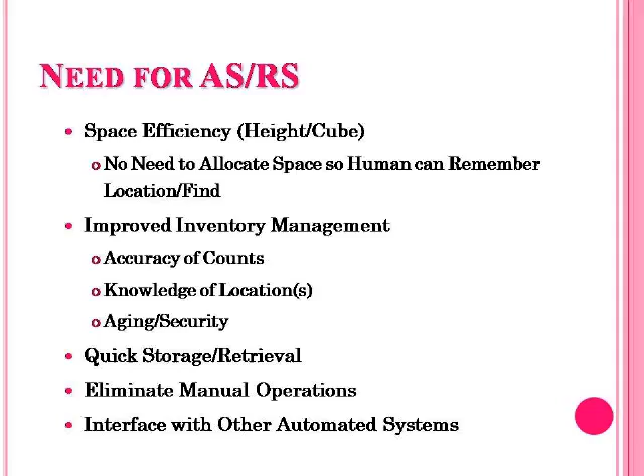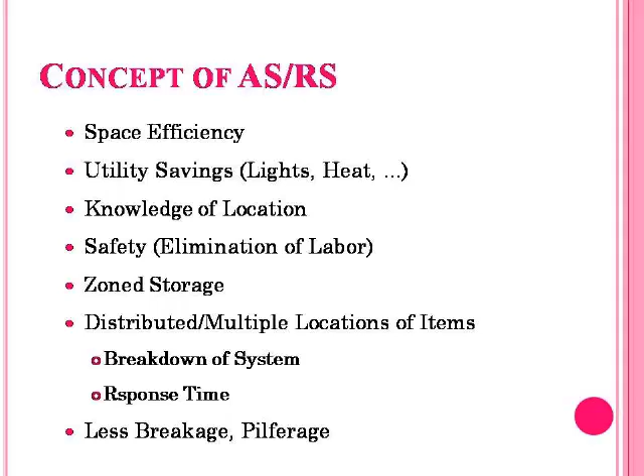The concept of ASRS arrived due to space efficiency, utility savings, knowledge of location, safety, zone storage, distribution, multiple locations of items, breakdowns of the systems, response time, and less breakage and pilferage, etc.

This storage or retrieval machine will travel in the aisle and try to locate items. It can move horizontally as well as vertically, and reach any space available in the storage racks. If the number of rows and columns are known, easily the ith row, jth column is the storage location of a storage rack. So the SR machine can be directed to move to that particular storage rack to retrieve or store the component.

And we have a storage space. The storage space is designed depending upon the maximum storage of the item in the manufacturing unit. Depending upon this, we can design the space of the storage rack.

Here we can have any number of units like this, depending upon the storage capacity that we want. This total height is called the rack height, this is the rack width, and this is the rack depth. The depth indicates how much length of the component, or how many baskets in which the components are placed, can be kept in each storage rack.

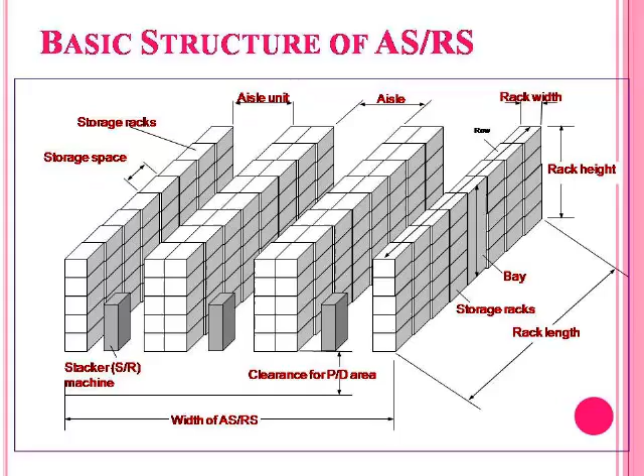This is the total rack length, and this is the total width of the ASRS. Width of the ASRS can be increased depending upon the space available on the shop floor, and the number of aisles and storage racks can be constructed accordingly.

The basic structure of the ASRS is just a storage structure. We have a storage and retrieval machine, the SR machine, which is normally a crane, and storage modules or pallets for unit loads. The loads are kept in pallets, and the pallets are kept in the storage bins.

One or more pickup and deposit stations can be used, where components are picked up, and stored items are retrieved and then placed. You can have more than one pickup and deposit station depending upon the number of requests for retrieval or storage of components.

You can have a number of servicing SR machines. At each SR machine we need one pickup and deposit station, and you can have any number of SR machines depending upon the number of aisles and other factors. This is always linked to the external handling system.

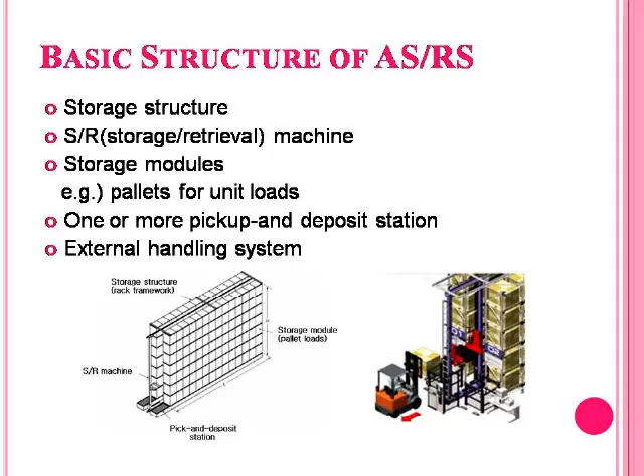The basic structure of the ASRS: this entire storage structure is normally a steel structure, clearly divided into a number of bays, each being a storage module. Depending on the kind of product we are going to store, we can design this as a transparent one or a closed kind of box.

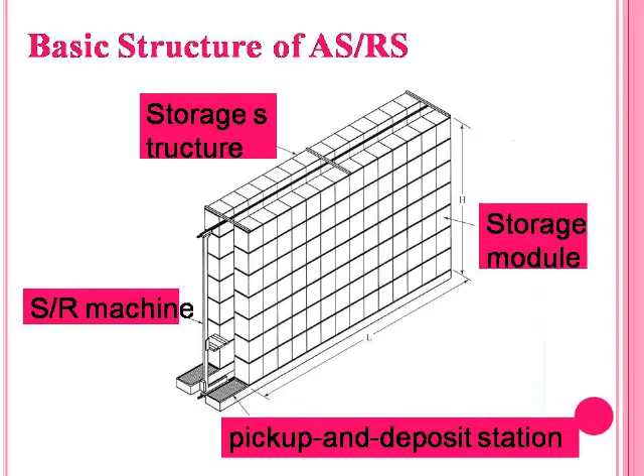And we have the SR machine, the storage and retrieval machine. It has a stacker crane, operated longitudinally and vertically within a storage module. The storage space, as discussed, is the three-dimensional space in the storage rack used to store a single load of material.

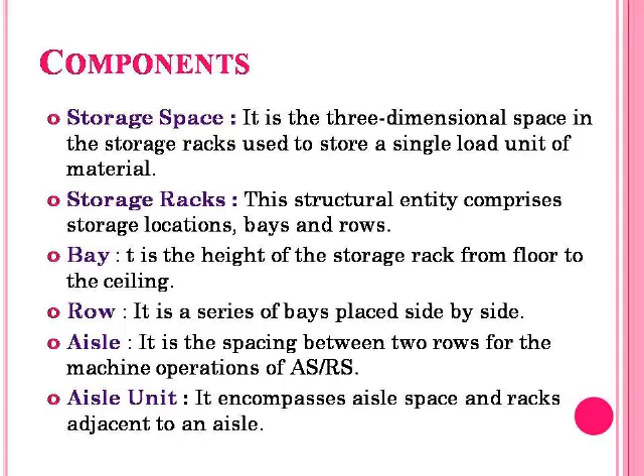Storage racks, this structural entity, comprise storage locations, bays, and rows. A bay is the height of the storage rack from floor to ceiling. A row is a series of bays placed side by side. An aisle is the spacing between two rows for the machine operations of the ASRS. An aisle unit encompasses the aisle space and racks adjacent to an aisle.

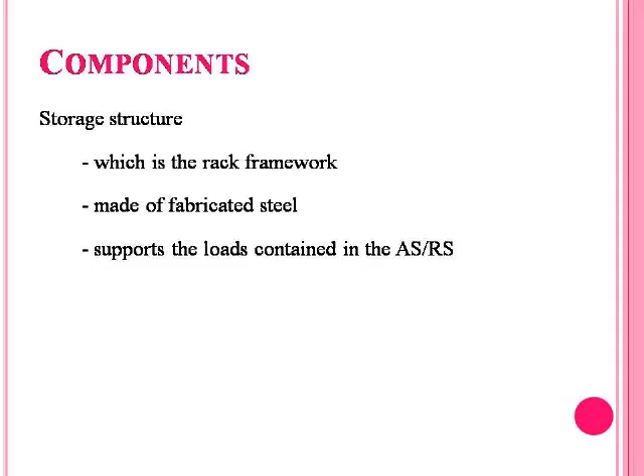Components: the storage structure is the rack framework made of fabricated steel, which supports the load contained in the ASRS. An SR machine, storage and retrieval machine, is used to accomplish storage transactions, delivering loads from the input station into storage, and retrieving loads or goods from storage to the retrieving station.

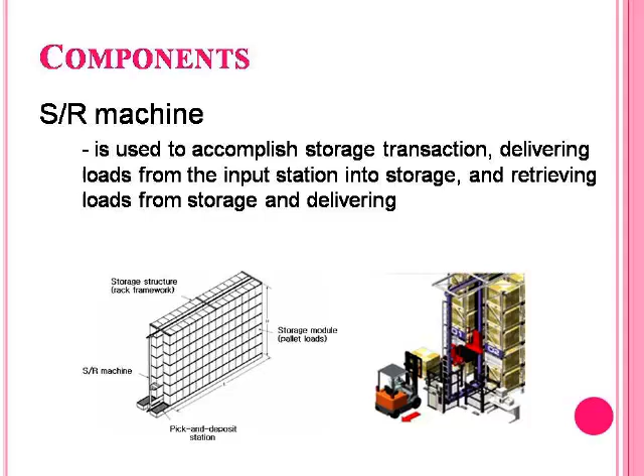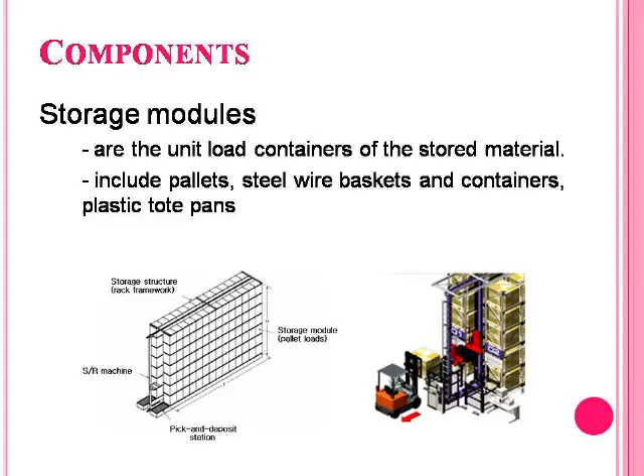So in these diagrams, you can see they are all self-explanatory about the SR machine. Storage modules are the unit load containers of the stored material, including pallets, steel wire baskets, containers, and plastic tote pans. The pickup and deposit station is where loads are transferred into and out of the ASRS, generally located at the aisle for access, for the external handling system that brings loads to the ASRS and takes loads away.

The components of ASRS include the external handling system that brings loads to the ASRS and takes loads away. You can take it as an AGV, RGV, or RTV - automated guided vehicle, rail guided vehicle, or robotic transfer vehicle. There are several kinds of external handling systems with which the ASRS has been integrated.

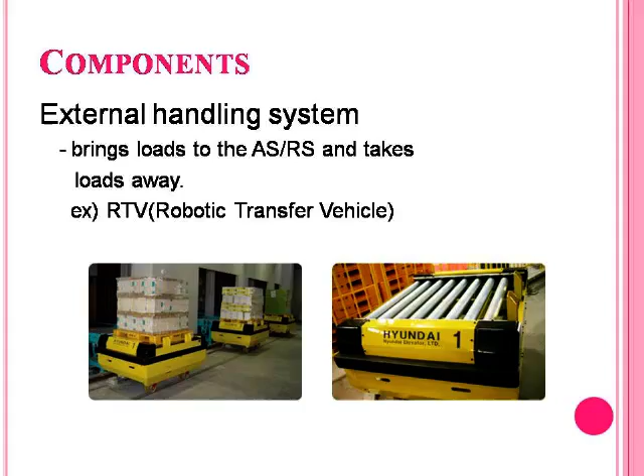Applications: ASRS associated with warehouses and distributed operation systems. Applications of ASRS include unit load storage and handling, order picking, and work in process storage systems, etc. ASRS for WIP - work in process inventory.

Buffer storage in production. Buffer is nothing but the semi-finished goods available between two workstations. When one workstation processes the part, after completion of the processing, it waits for the second workstation to get processed. Meanwhile, it has to wait for sometimes for the inspection purpose also.

In these cases, this waiting for the next operation - a semi-finished good waiting for the next operation - is called in-process inventory, or work in process inventory.

This WIP is a raw material on which certain operations are performed, and it is waiting for certain operations to be done on that. When the waiting time is in days, it has to be sent back to the warehouse or storage and retrieval system, and it will be picked up as and when it is required. Otherwise, the entire space between the two machines gets filled up with the WIP, and there is no space for work.

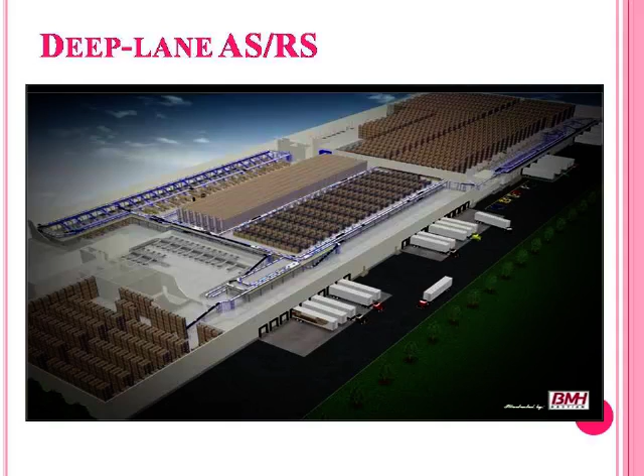A typical deep lane ASRS system can be seen in this slide, in which there is a very big warehouse where a lot of SR machines and pickup and deposition stations are available. Different kinds of parts, different types of parts, and different storage capacities can all be structurally fabricated and kept in this deep lane ASRS system, the main function of which in a warehouse is to store and retrieve the parts.

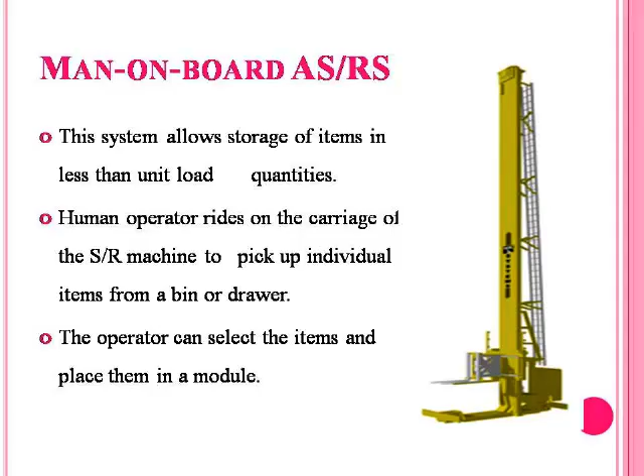Man on board ASRS: this system allows storage of items in less than unit load quantities. A human operator rides on the carriage of the SR machine to pick up individual items from the bin or drawer. The human being stands on the SR machine and himself picks up the parts or places the parts from the SR machine into the bins or from the bins to the SR machine for unloading. The operator can select the items and place them in a module. This is a semi-automatic kind of environment, and in many situations this kind of man on board ASRS is being used widely.

Automated item retrieval system: this system is designed for retrieval of individual items or small product cartons. The items are stored in lanes rather than bins or drawers. When an item is retrieved from the front by use of a rear mounted pusher bar, it is delivered to the pickup station by pushing it from its lane and dropping it into a conveyor.

Let us now discuss the important aspect of design of automatic storage and retrieval systems. One is load size determination, so we have to calculate the size of the storage space and its dimensions. Let L equal length, W equal width, and H equal height. L is given by Ny multiplied by L plus X, width is U multiplied by B plus Y, and height is Nz multiplied by H plus Z, where Ny, Nz are respectively the number of load compartments in Y and Z directions, and U is the storage depth in number of unit loads.

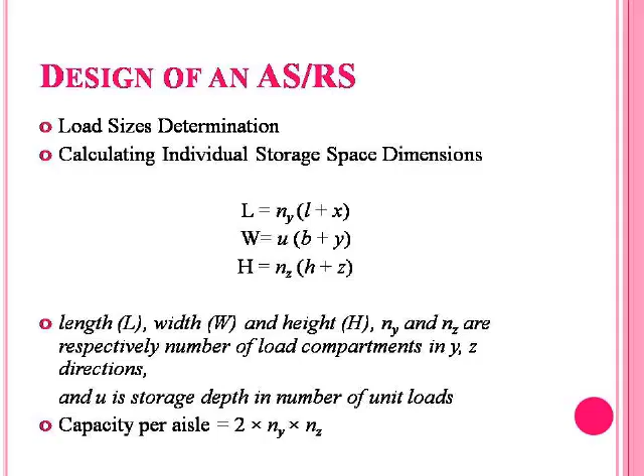Capacity per aisle would be 2 multiplied by Ny multiplied by Nz. It's a direct simple formula, because either side of the SR machine can be used for storage and retrieval, that's why the capacity per aisle is 2 multiplied by Ny multiplied by Nz.

A 4 aisle ASRS is to contain 60 storage compartments in length and 12 compartments vertically. X is equal to 42 inches, Y is 48 inches, and the height of the unit load Z is equal to 36 inches. Then the storage capacity is equal to 2 into 60 into 12, which is 1440 unit loads.

The width, length and height of the ASRS: W is equal to 3 multiplied by 42 plus 6, giving 144 inches or 12 feet per aisle, and overall width is 4 into 12, equal to 48 feet. L, the total length, is equal to 60 multiplied by 48 plus 8, equal to 280 feet. H is equal to 12 multiplied by 36 plus 10, which is equal to 46 feet. That's how we can easily find out the length, height and width of the ASRS.

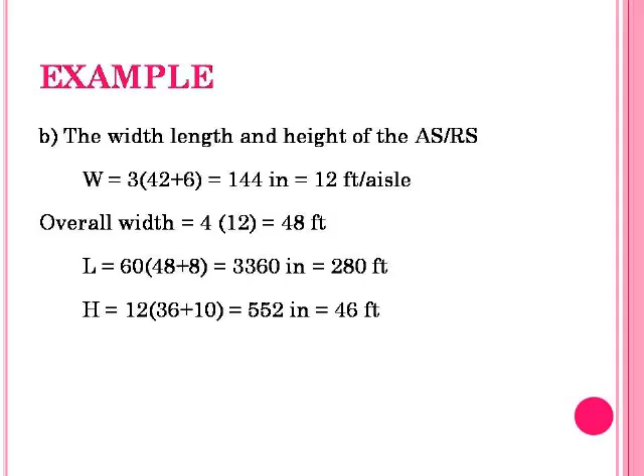Design of an ASRS also involves estimating the number of storage spaces. Aggregate inventory level of all the products is taken into account for the determination of storage space. Total inventory of the components estimated on the shop floor or off the shop floor must be taken into consideration to estimate the total storage capacity.

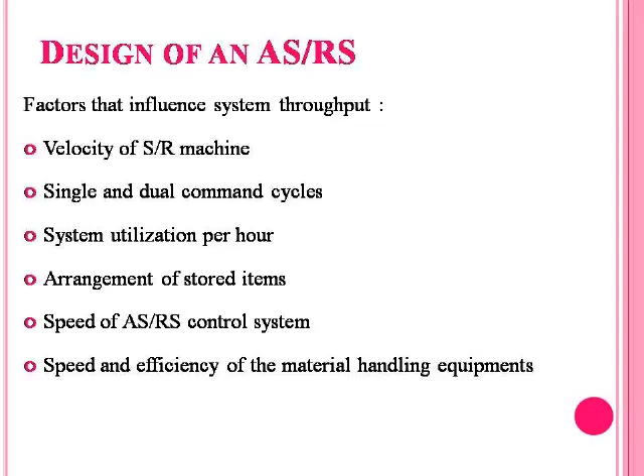Estimation of ASRS throughput and number of SR machines: the system throughput is defined as the hourly rate of SR transactions that an automated storage system can perform. Factors that influence the system throughput are velocity of the SR machine, single and dual command cycles, system utilization per hour, arrangement of stored items, speed of the ASRS control system, and speed and efficiency of the material handling equipment.

Design of an ASRS also involves estimating the size parameters of the storage and retrieval system. The number of rows in the system is equal to 2 into the number of SR machines in the system.

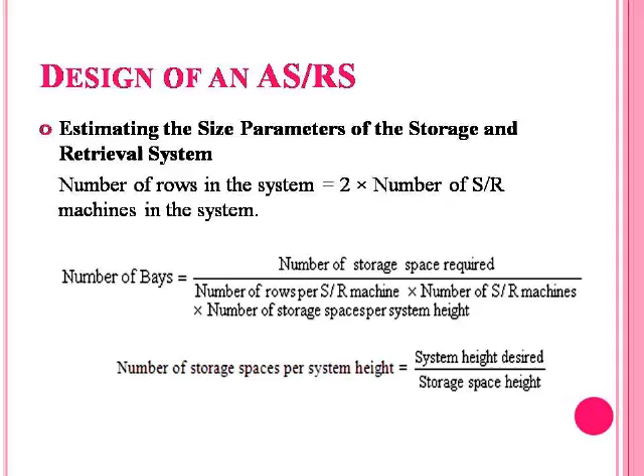You can now get the number of bays, which is equal to number of storage spaces required divided by number of rows per SR machine multiplied by number of SR machines multiplied by storage spaces per system height, where number of storage spaces per system height is equal to system height desired divided by storage space height. Now, continuing the design of an ASRS, we will see how to estimate the bay width, system width, rack length, system length, bay depth, and aisle unit.

Bay width is equal to length of storage space plus center to center rack support system, or rack support width is L plus X plus X1. Rack length is equal to bay width multiplied by number of bays. System length is equal to rack length plus clearance for SR machine plus pickup and deposition area, where X1 is the center to center rack support width.

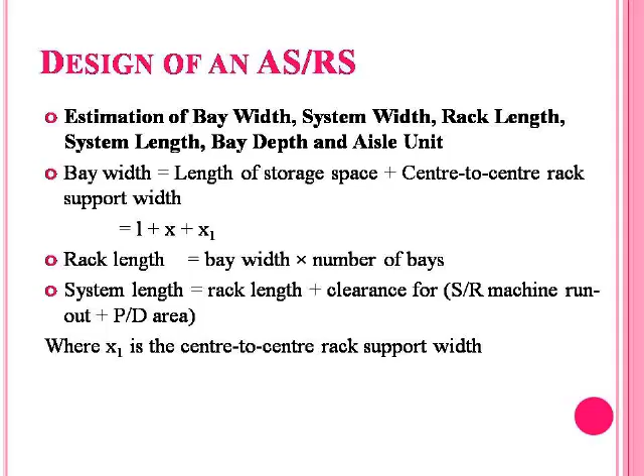Bay depth is equal to width of the individual storage space plus bay side support allowance, which is equal to U multiplied by B plus Z plus X2, where X2 is the bay side support allowance. Aisle unit is equal to aisle width plus 2 multiplied by bay depth. System width is equal to aisle unit multiplied by desired number of aisles.

ASRS can act on two command cycles. One is called the single command cycle, the other one is called the dual command cycle. In the single command cycle, the ASRS performs only loading operation or unloading operation.

The cycle starts with movement of the SR machine to a particular place, picking up the parts from there, retrieving them, and placing them at the PD station. This is only single command. Or it picks the part from the PD station and places it in a desired location and comes back. So either it does only one operation, either pickup or deposition.

This is called a single command cycle. The other cycle is dual command cycle, in which both storage and retrieval operations are done simultaneously. That means the SR machine will take one part from the PD station and take it to the desired location, put the part, then go to the location where it has to retrieve another part, retrieve it, and bring it back to the PD station to deposit it. So both loading and unloading operations are done with the same command signal. This is called a dual command cycle.

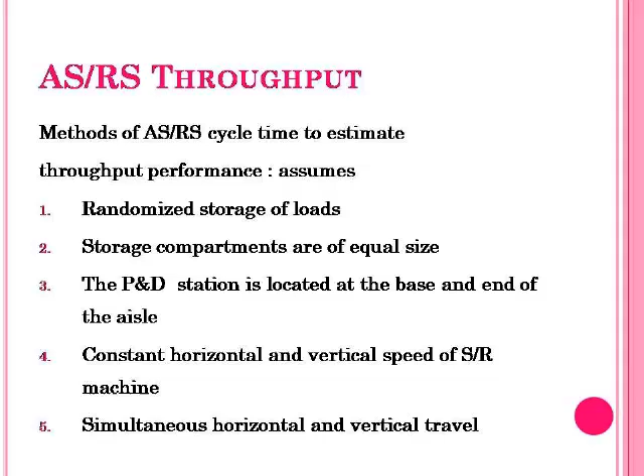The single command cycle works like this. The ASRS throughput single command cycle time, TCS, is equal to 2 into maximum of L by 2 plus L by 2 or H by 2 divided by Vy or Vz, that is L divided by 2Vy or H divided by 2Vz plus 2 TPD, or it is equal to maximum of L by Vy or H by Vz plus 2 TPD.

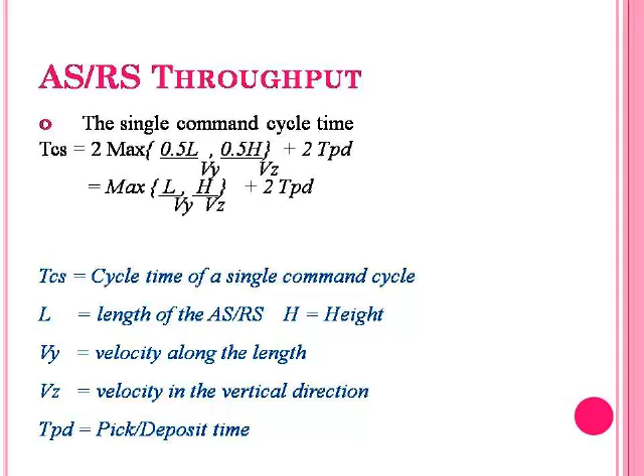TCS is cycle time for single command cycle. L is length of the ASRS, H is height, Vy is velocity along the length, Vz is velocity in vertical direction, and TPD is pickup deposition time.

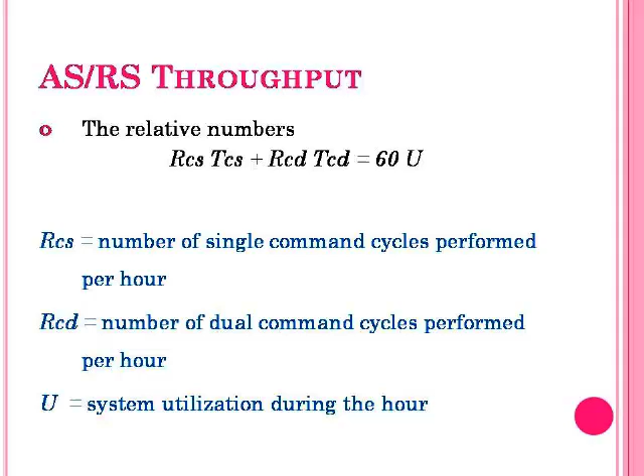The relative numbers: RCS TCS plus RCD TCD is equal to 60U. RCS is the number of single command cycles performed per hour, and RCD is the number of dual command cycles performed per hour. U is system utilization during the hour.

The total SR cycle rate, or number of cycles per hour, RC, is equal to RCS plus RCD. The total number of transactions performed per hour, RT, is equal to RCS plus 2 into RCD.

Let us discuss the entire thing with a small example. The length of the ASRS unit is 280 feet and height is 46 feet. The SR machine's horizontal speed Vy is 200 feet per minute, and vertical speed Vz is equal to 75 feet per minute. The pickup and deposition operations time is approximately 20 seconds to accomplish.

So let us now calculate TCS, the cycle time in single command mode: maximum of 280 divided by 200 or 46 by 75, plus 2 into 20 by 60.

So maximum of 280 by 200 is around 1.4, and 46 by 75 is less. So 1.4 is more, meaning 2.06 minutes per cycle is the TCS. TCD is calculated the same way: 1.5 multiplied by 280 by 200, or 1.5 multiplied by 46 by 75 plus 4 into 20 by 60. You take only the maximum of these two quantities, and it is computed as 3.432 minutes per cycle.

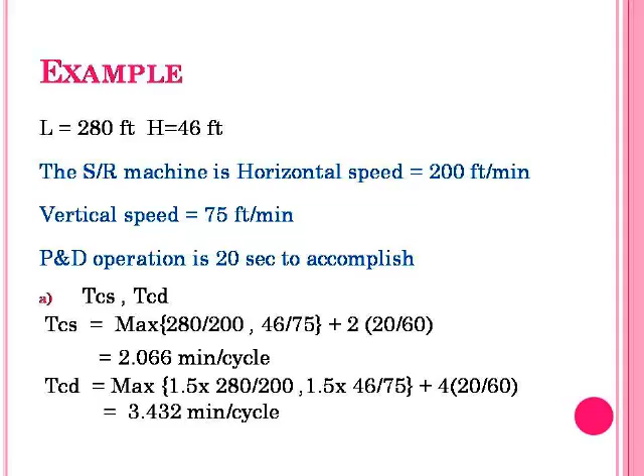Throughput per aisle, U is 90%, single command is equal to dual command. RCS TCS plus RCD TCD equals 60U formula, you have to use it here. RCS multiplied by 2.066 plus RCD multiplied by 3.432, equals 60 into 90%.

So RCS is equal to RCD, and 5.498 RCS equals 54, so RCS equals RCD equals 9.822 cycles per hour. And we can calculate RT, and RT is calculated as 116 transactions per hour from this example.

Control, how to control entire operations. We can control the entire operations of ASRS using a computer. The computer has software for the entire position of the bay and locations, and the location distance from P and D points, everything. Command signals are also drawn in the computer program, and we only need to give the commands for deposition and retrieval.

Principal problem is positioning of the S/R machine within the acceptable tolerance. It has storage compartments in the rack structure to deposit the unit load. This problem can be avoided by having feedback sensing systems.

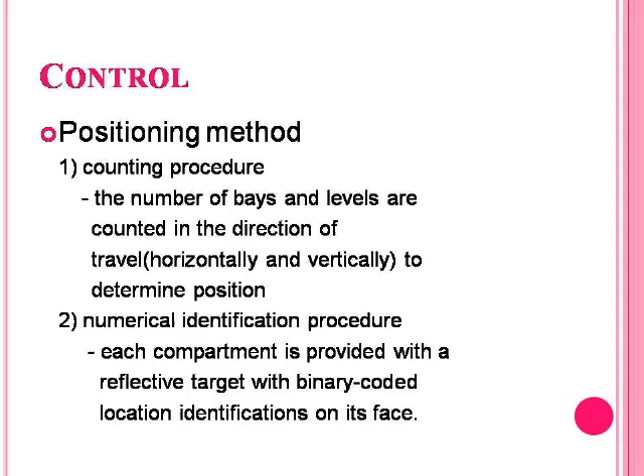Positioning method is the counting procedure: the number of bays and levels are counted in the direction of travel to determine the position. Another is the numerical identification procedure: each compartment is provided with a reflective target with binary coded location identification on its face. Optical scanners are used to read the target and position the shuttle for deposition or retrieval of the load.

Scanners read RFID, radio frequency identification tags on pallets. The RFID targets have information like compartment binary code, position, sections, etc.

Each time a storage transaction is completed, the transaction must be recorded into the computer. The computer controls the storage transactions which can be entered in real time. Inventory records can be accurately maintained, system performance can be monitored, and communications can be facilitated with other factory computer systems.

The benefits of automated storage and retrieval systems include high space efficiency, increased storage capacity to meet long-term plans, improved inventory management and control, quick response time to locate, store and retrieve items, reduced shortages of inventory items due to real-time tracking, reduced labor costs, and improved stock rotation.

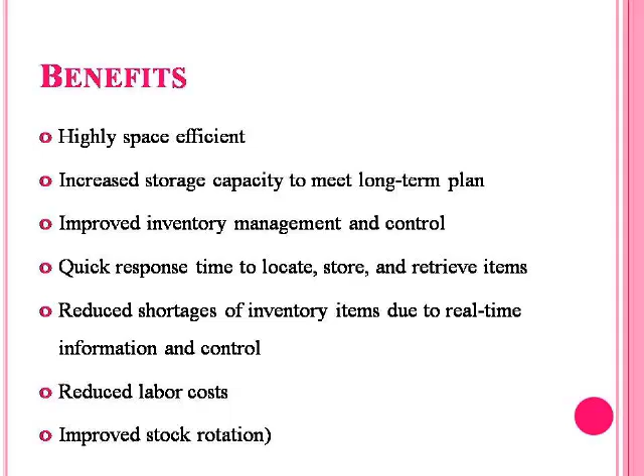Other benefits include improved security and reduced pilferage, flexibility in design to accommodate a wide variety of loads, flexibility in interfacing with other systems, reduced scrap and rework, reduced operating expenses for light, power, heat, etc., and it helps implementation of just-in-time concepts.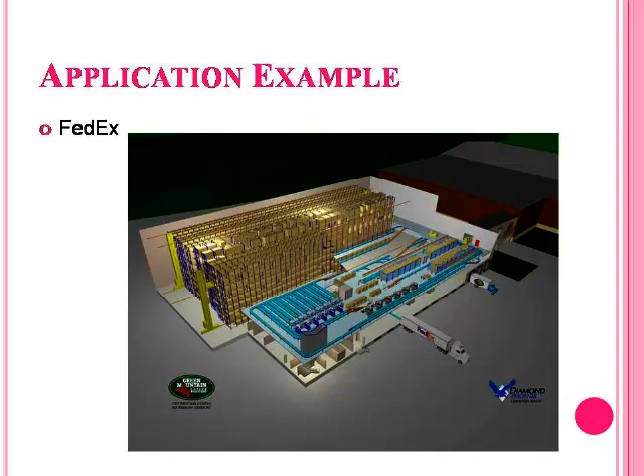This is a typical FedEx ASRS. FedEx brings a lot of parcels and packages and sorts them with some standards, such as delivery zone, then loads some parcels and packages into delivery trucks and delivers articles at house.

ASRS can be used in many kinds of manufacturing lines and distribution centers. Using ASRS with proper design will produce the many kinds of benefits mentioned, and ASRS is an integral part of computer integrated manufacturing. In CIM, the main benefit is to maintain optimal inventory levels, and in order to do that we need control over inventory and WIP, and ASRS is the ultimate solution for that.

ASRS is omnipresent in any computer integrated manufacturing system, and we strongly recommend the application of ASRS in a CIM factory. Dear students, I would like to emphasize the application of automated storage and retrieval systems in the computer integrated manufacturing environment, and not only in CIM environment, it can be used in many operations like warehouse maintenance and other things.

ASRS is used, and the kind of knowledge that we got in this lecture is how ASRS is used, what kinds of ASRS are used, how to design the ASRS system in detail, how to control the ASRS and the methods of controlling it, and the benefits and implementation of ASRS, particularly in a CIM environment, which we have discussed.